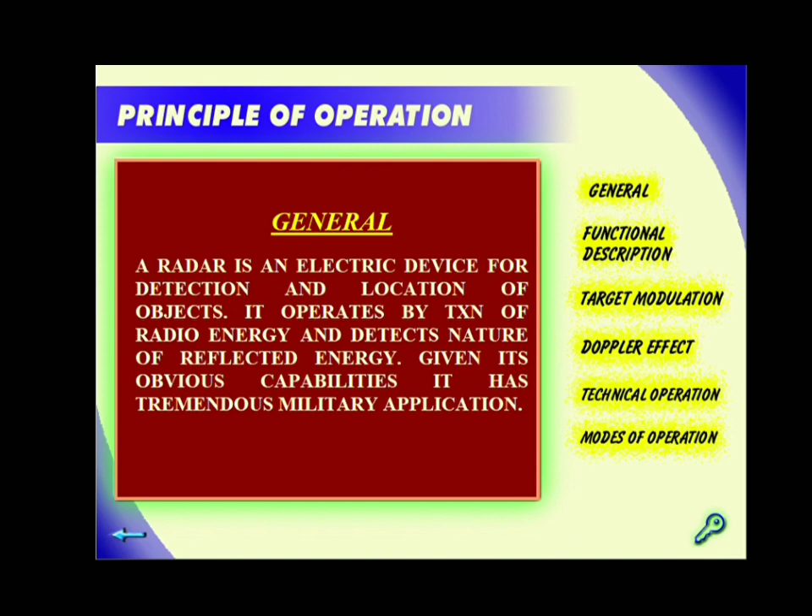Functional description. The basic functioning of the BFSR Mark II depends on the transmission of 2600 pulses of RF energy per second in a narrow beam from its antenna. Between pulses, the radar receives energy reflected back to its antenna from any object in the path of the antenna beam.

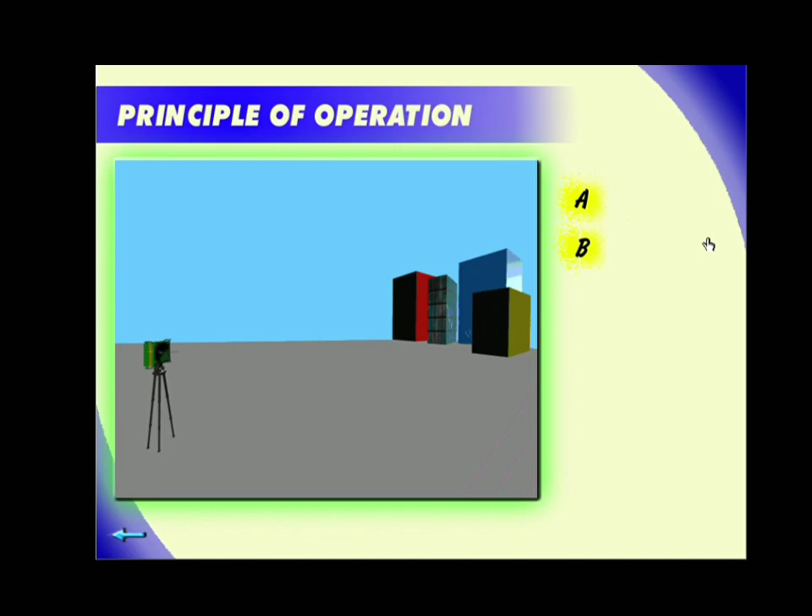Target modulation. The BFSR Mark II is a non-coherent pulse Doppler system. In this type of radar, target detection is possible only when target movement takes place in the presence of a fixed background. Target detection will be difficult in certain conditions. It is difficult in case the background is very large compared to the target, for example, a man crawling in front of a huge building. Target detection is also difficult in case the background signal is very small, for example, a large vehicle moving in a valley.

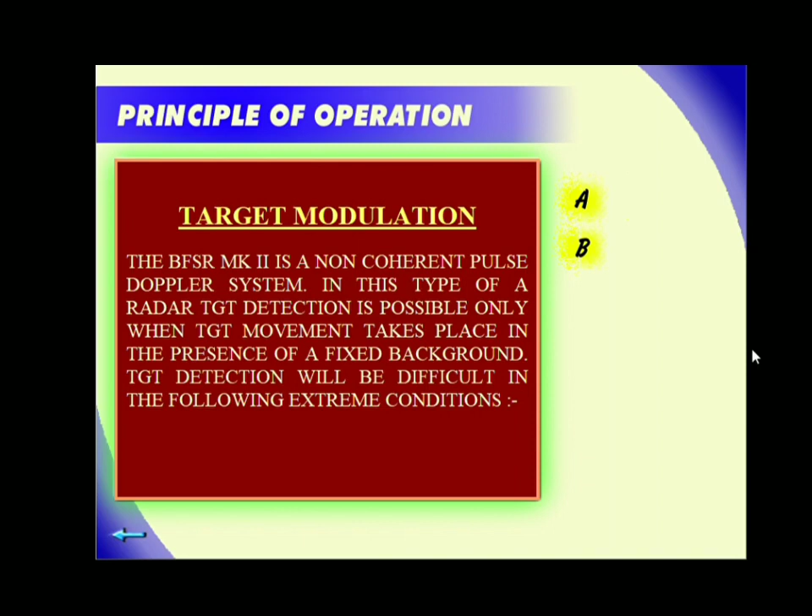Target modulation. The BFSR Mark II is a non-coherent pulse Doppler system. In this type of a radar, target detection is possible only when target movement takes place in the presence of a fixed background. Target detection will be difficult in certain conditions. Target detection is difficult in case the background is very large compared to the target. An example is a man crawling in front of a huge building. Target detection is also difficult in case the background signal is very small. For example, a large vehicle moving in a valley.

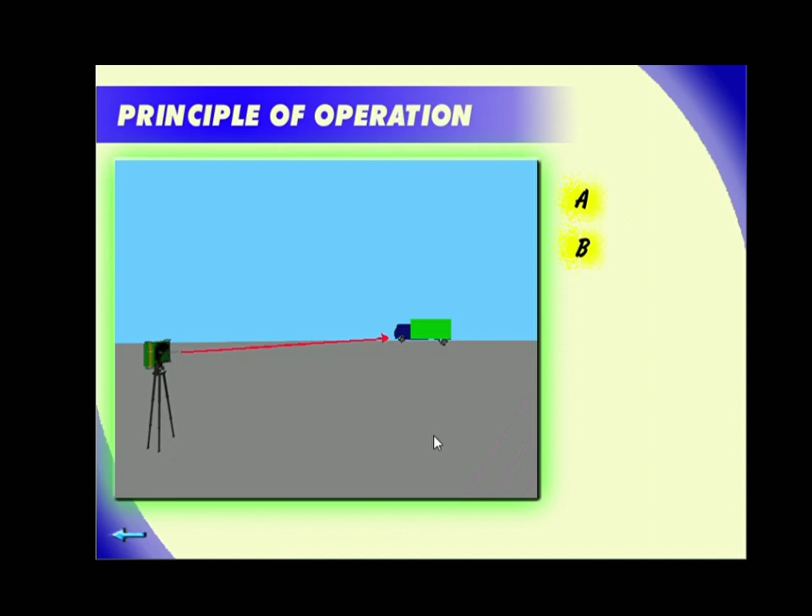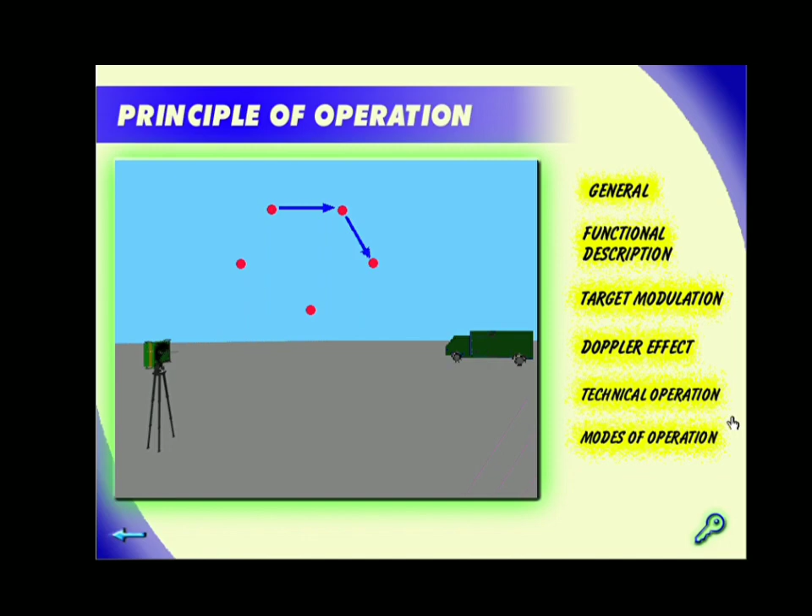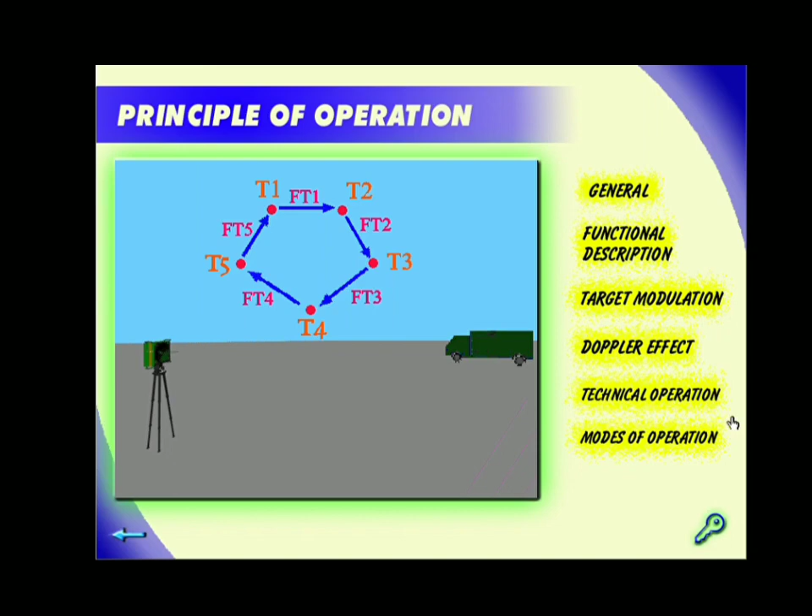The Doppler effect. Consider that there are 5 fixed targets T1 to T5. The echo signal returned from these targets can be represented by FT1 to FT5. Since all of them are fixed echoes, FTR will represent the resultant vector of these echoes. In case now there is a moving target in the same area, say MT, the return signal echo of MT with reference to FTR will vary over 360 degrees.

Each time the moving target traverses a distance equal to half the wavelength, which in the case of the BFSR Mark II is 1.5 centimeters, a phase change of 180 degrees corresponding to a target movement of 0.75 centimeters will result in the amplitude of the resultant signal varying from a maximum to a minimum value.

Hence, a continuously moving target produces a resultant signal which varies in amplitude in a sinusoidal manner. The frequency or rate of variation of this amplitude depends on the speed of movement of the target. In the BFSR Mark II, these Doppler frequencies are in the range of 40 hertz to 1200 hertz, for target speeds varying from 2 kilometers per hour to 64 kilometers per hour, which are in the lower audio band. Therefore, echoes from moving targets like men and vehicles can be heard on headsets.

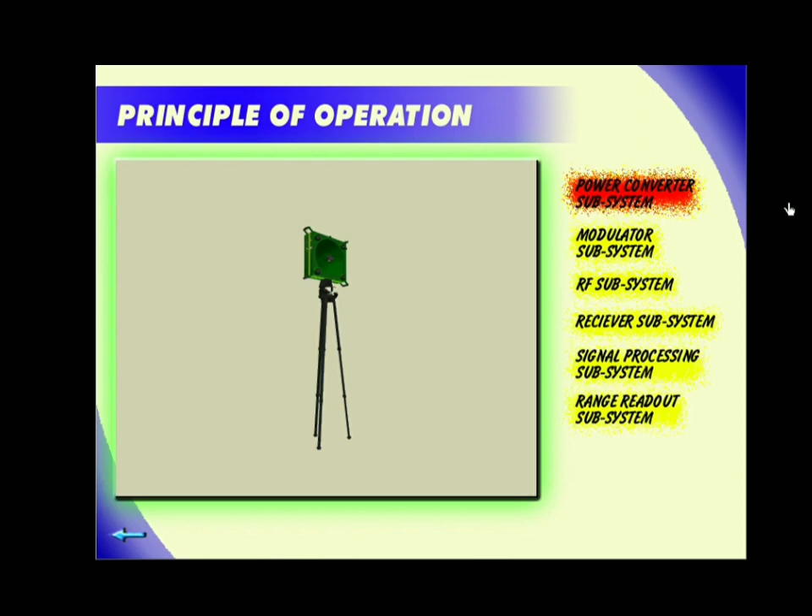The power converter subsystem receives 24 volt DC from the battery and converts it to the voltage required by the radar. It protects the radar from overload currents and incorrect input polarity. It generates master timing pulses for the system.

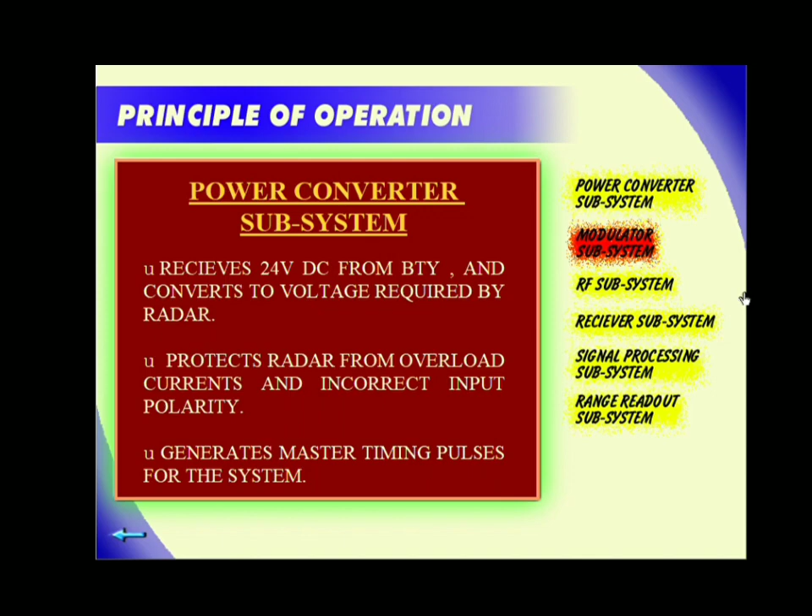The modulator subsystem generates high voltage negative DC pulses at the required pulse repetition rate.

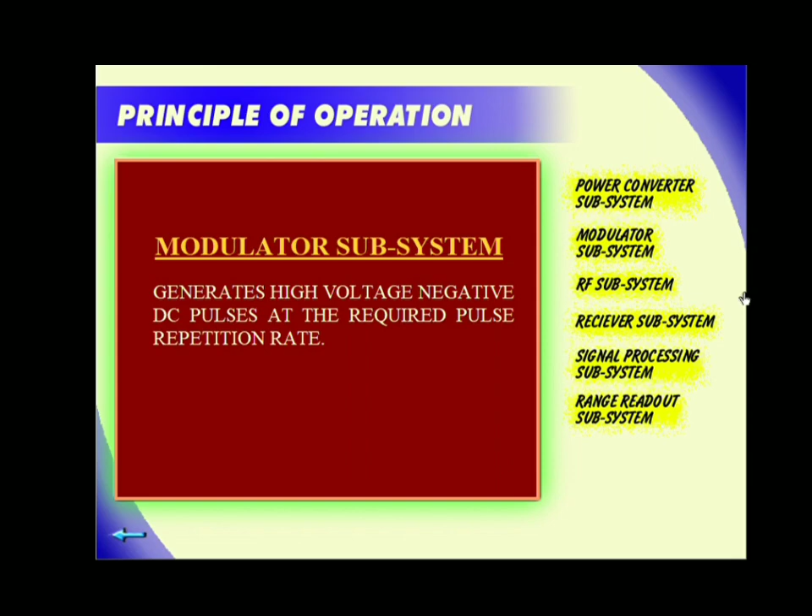The RF subsystem generates and radiates RF pulses. It receives RF target echoes. It converts target echoes from RF to IF, and it provides a confidence check facility.

The receiver subsystem converts target echo signals at IF to video signals.

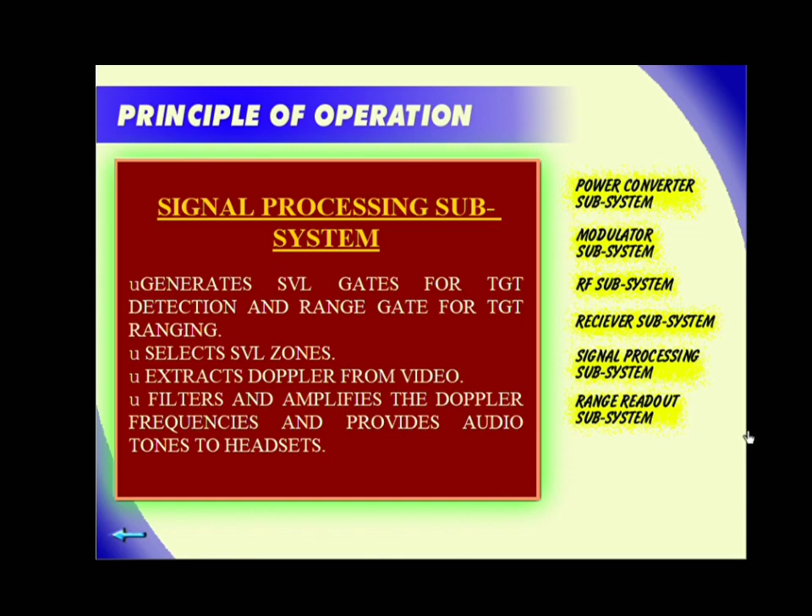The signal processing subsystem generates surveillance gates for target detection and range gate for target ranging. It selects surveillance zones, extracts Doppler from video, filters and amplifies the Doppler frequencies, and provides audio tones to headsets.

The range readout subsystem generates clock frequencies to drive displays of target range in meters. It monitors external power supply voltage and provides lamp indication for replacement of batteries. It filters and amplifies the Doppler frequencies and provides audio tones to headsets.

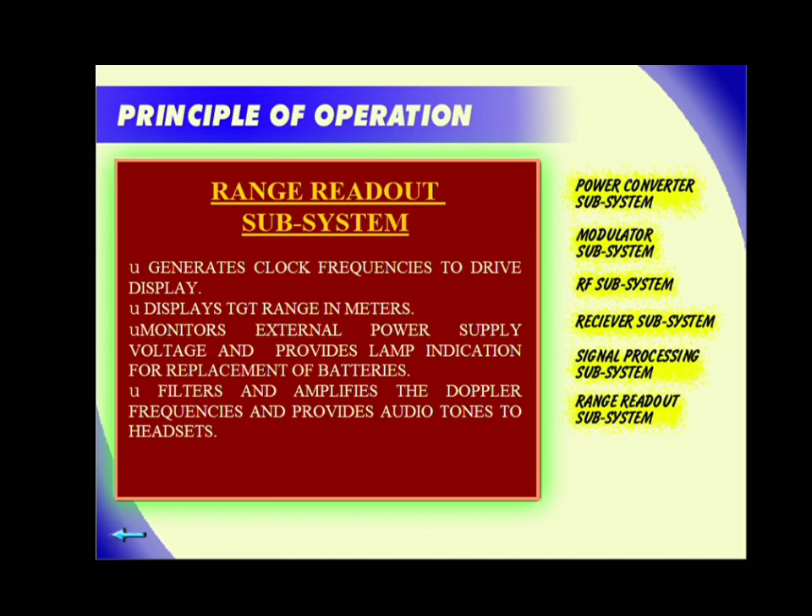The modes of operation of the BFSR Mark II. There are two basic functions the BFSR Mark II performs. The first is the determination of the presence or absence of a moving target in a given sector within its range capability. Having determined that the moving target is present within the radar's coverage, the second function is to obtain information regarding the position of the target, that is, the azimuth angle and the range, the nature of the target, that is, vehicle or personnel, and the activity the target is involved in.

Keeping this in mind, the signal processing circuit of the BFSR Mark II can be operated in two modes.

The surveillance mode. In this mode of operation, the detection range of 3,200 meters is divided into 4 surveillance zones, each of 800 meters. Each of these surveillance zones, in turn, consists of 8 surveillance gates. In case a moving target exists in a particular zone, a Doppler signal is heard.

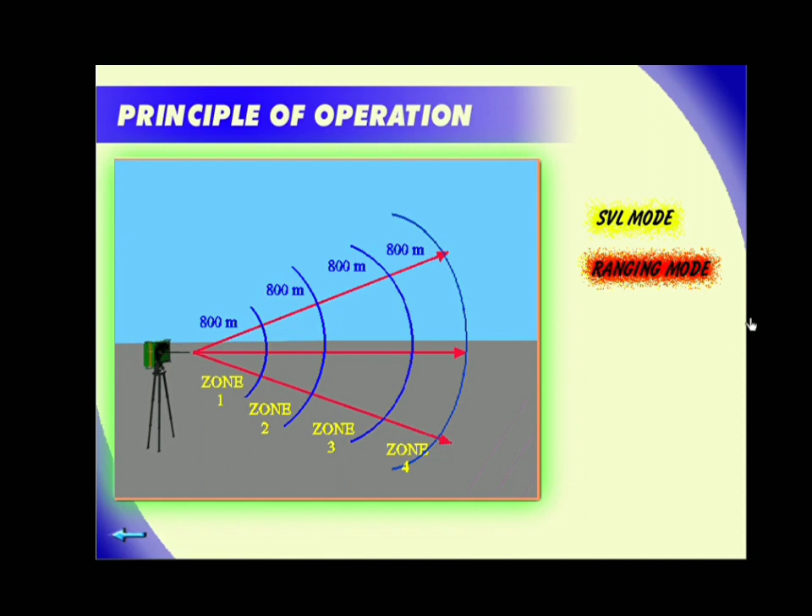The ranging mode. Having determined the presence of a moving target, the ranging mode enables the target range to be obtained. In this mode, the target can also be tracked as the signal processing subsystem generates a single range gate of 0.66 microseconds width, corresponding to a range of 100 meters, which can be continuously moved by a ranging handwheel. Thus, the target detected in a particular zone can now be pinpointed up to the nearest 100 meters.

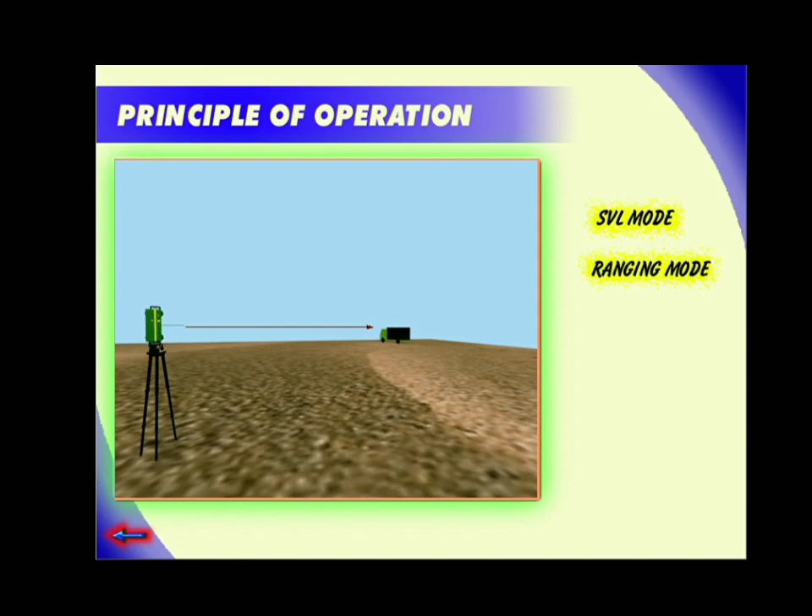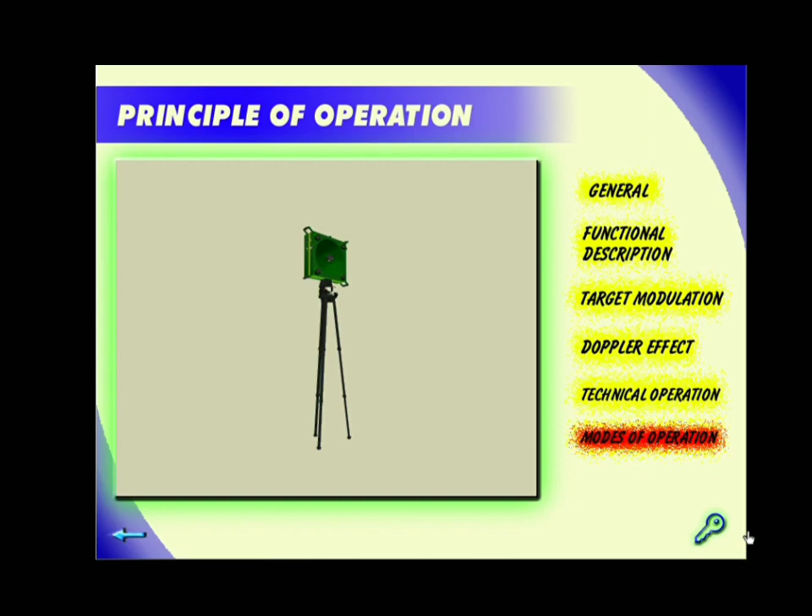The modes of operation of the BFSR Mark II.

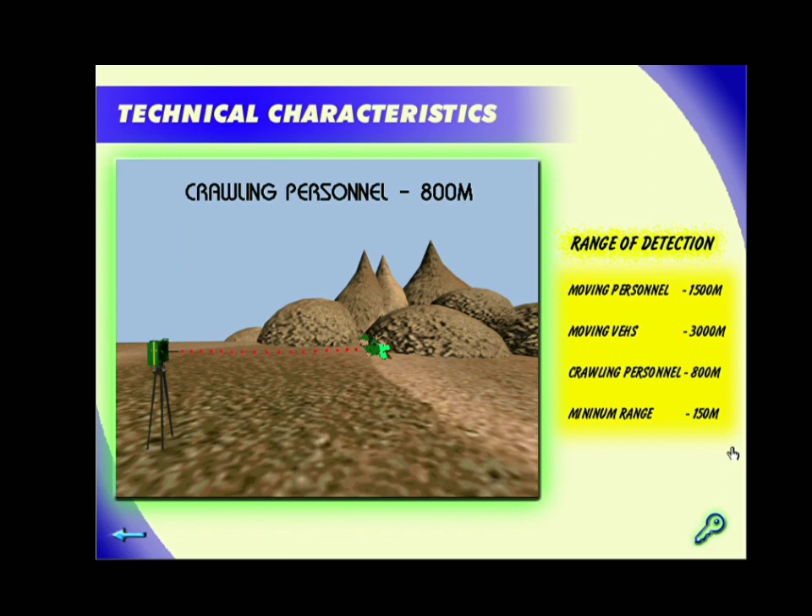The range of detection of moving personnel is 1500 meters. The range of detection of moving vehicles is 3000 meters. The range of detection of crawling personnel is 800 meters. The minimum range of the BFSR Mark II is 150 meters.

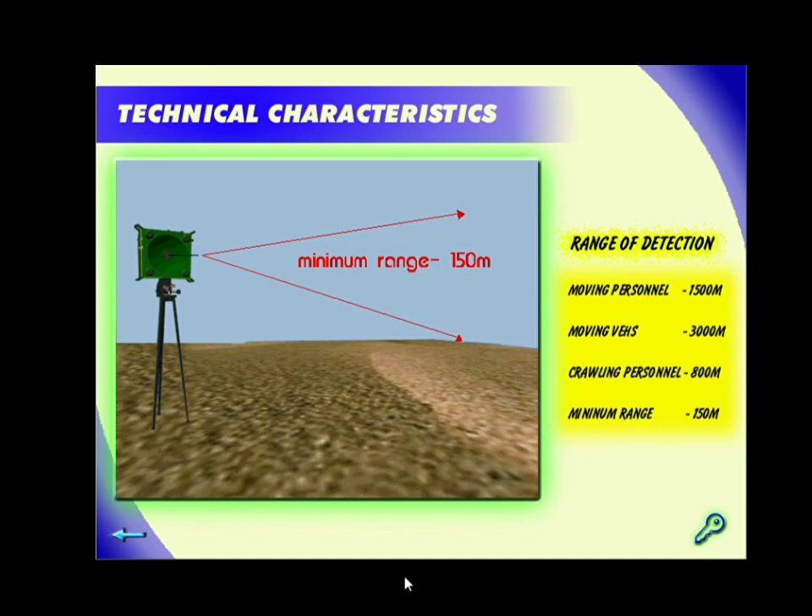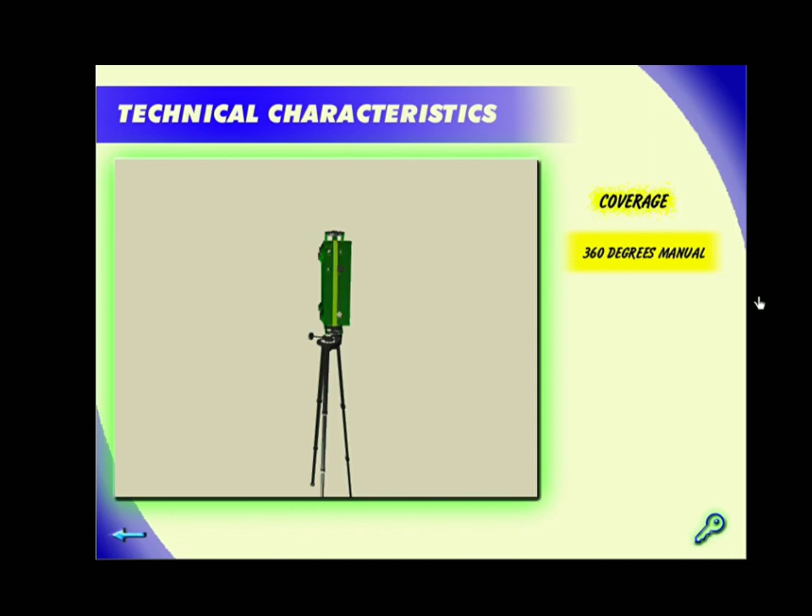The BFSR Mark II has a 360 degrees manual coverage. The setting up time of the BFSR Mark II is 5 minutes.

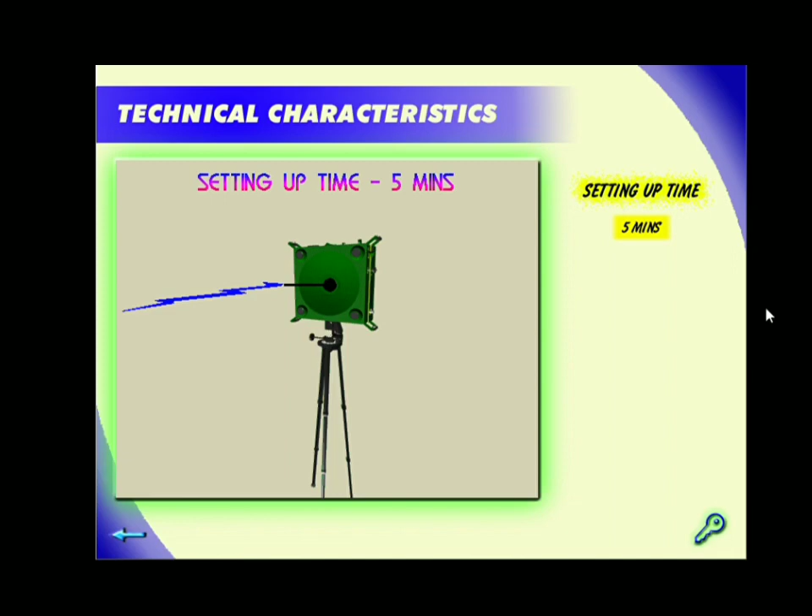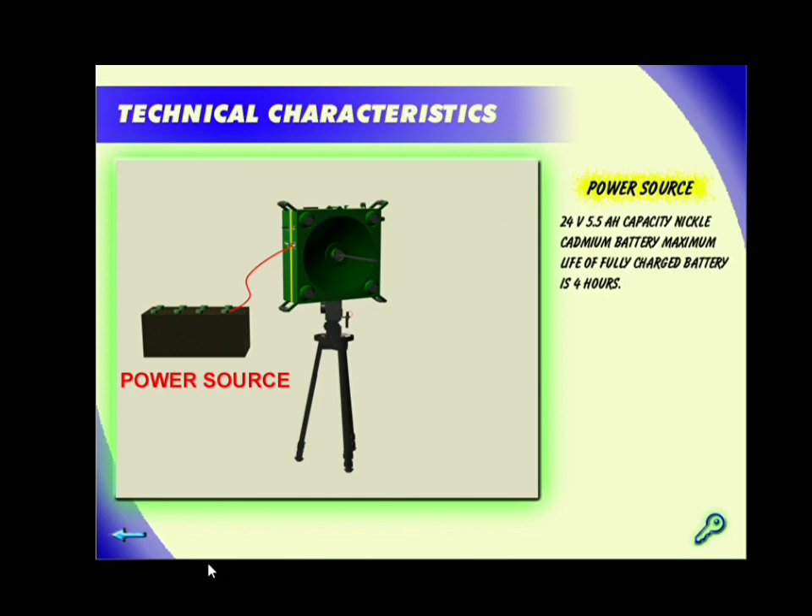The BFSR Mark II has got a 24-volt nickel cadmium battery which has got a maximum life of 4 hours. The weight of various components is as follows: the radar unit is 6.4 kgs, the battery pack is 7.5 kgs, and the tripod stand is 2.2 kg.

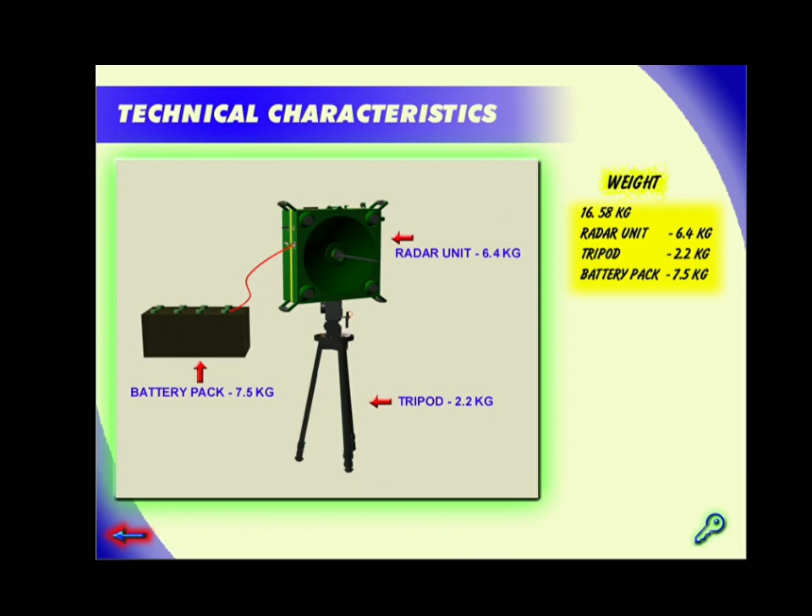The BFSR Mark II transmits RF pulses at a frequency of 9750 MHz.

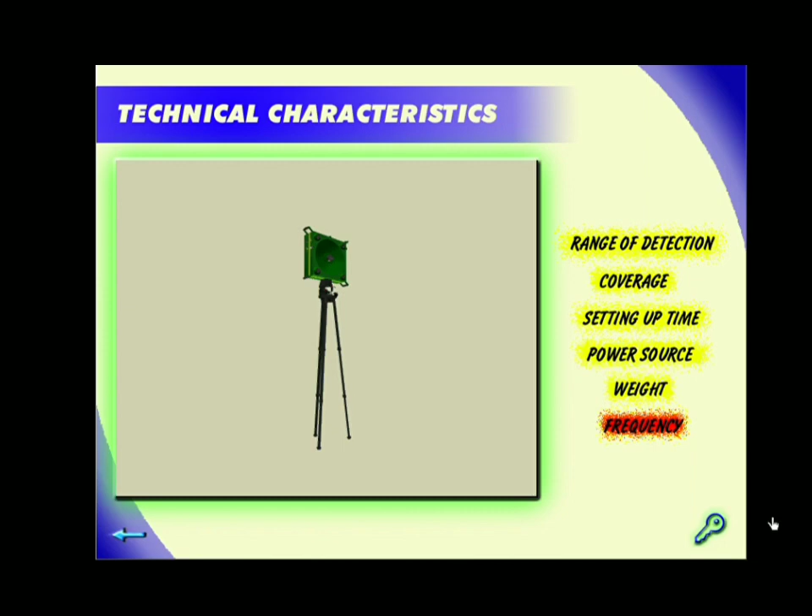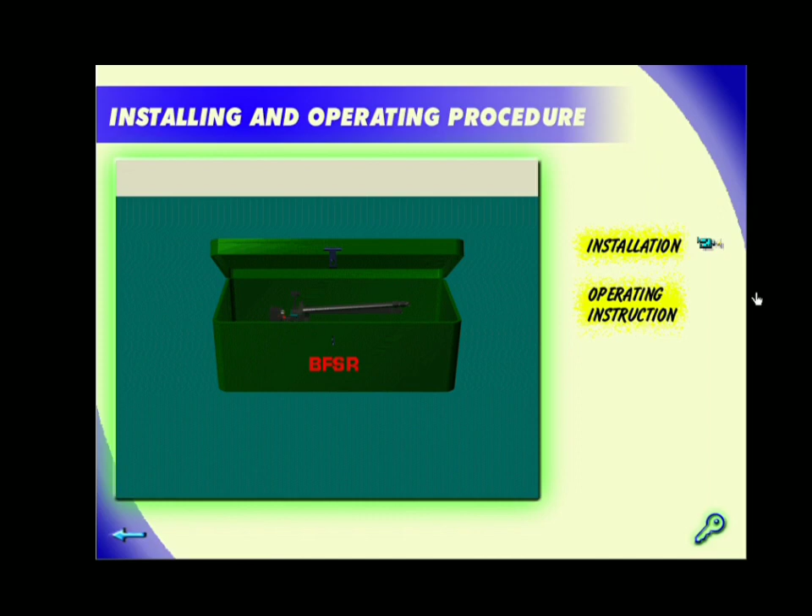Installation procedure: unpack the legs on a level piece of ground and open them. Extend the legs till the required height is obtained and lock them. Screw in the control handle and loosen the base plate locking knurled knob.

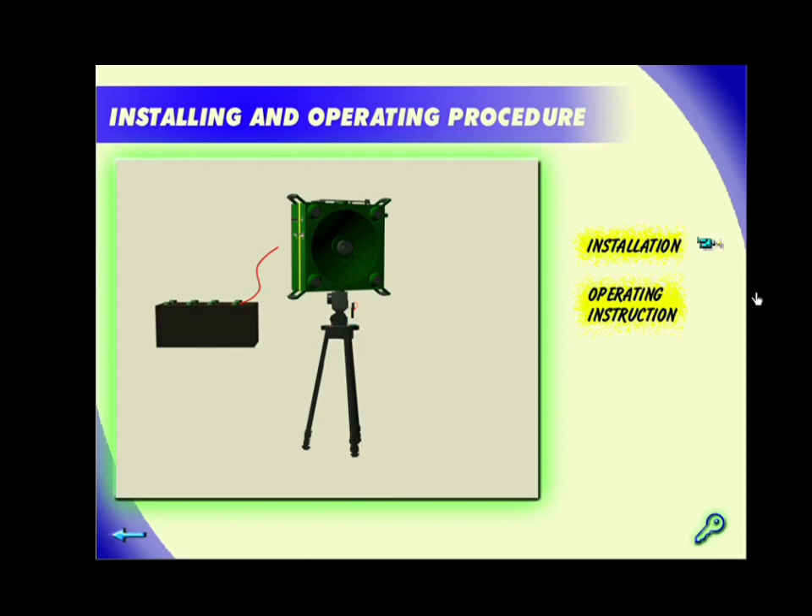Remove the radar unit and mount it on the tripod mounting. Position the radar in such a way so as to ensure the antenna faces away from the operator. Lock the knurled knob and fix the waveguide dipole onto the antenna reflector.

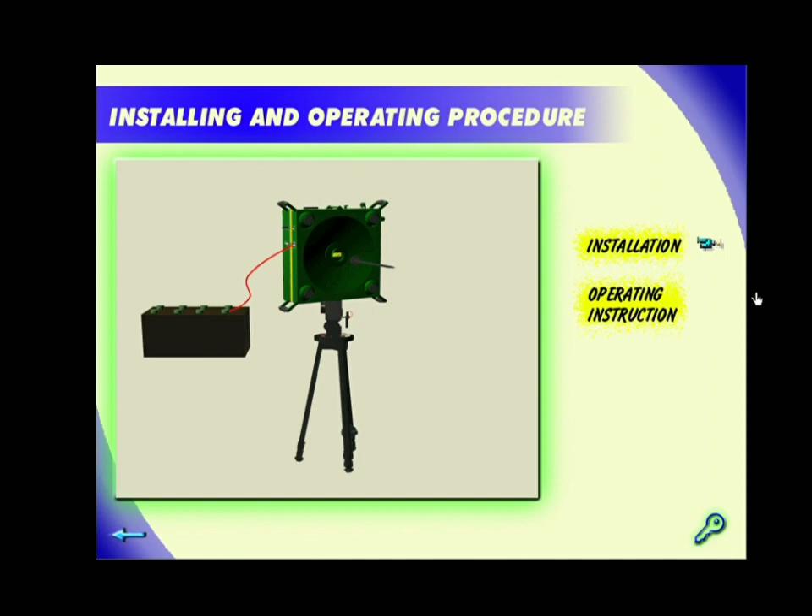Connect the headset assembly. Connect the power cable to the input 24-volt connector on the left side of the radar casing. Now connect the battery, and ensure that power is switched off before making the battery connection.

Thereafter, place the pentaprism on the range readout window, which is useful for the operator to read the range values without exposing his face. The equipment is now ready for operation.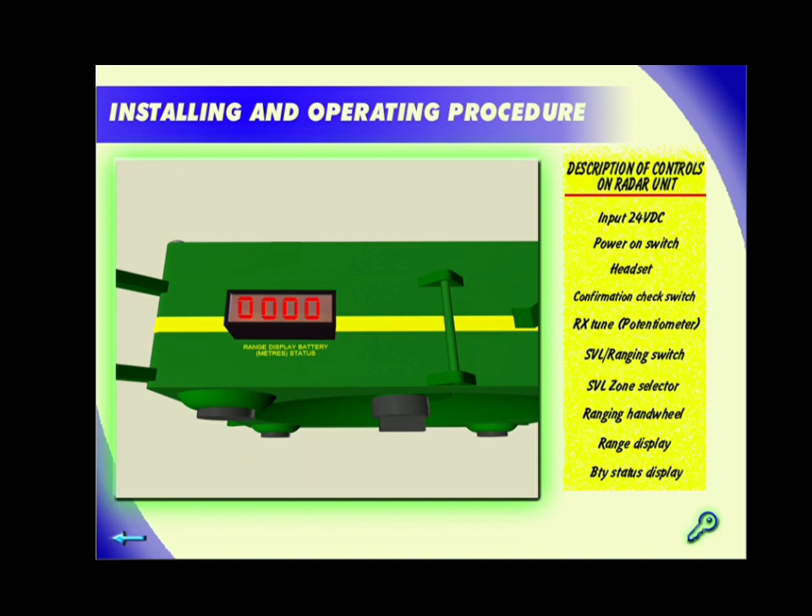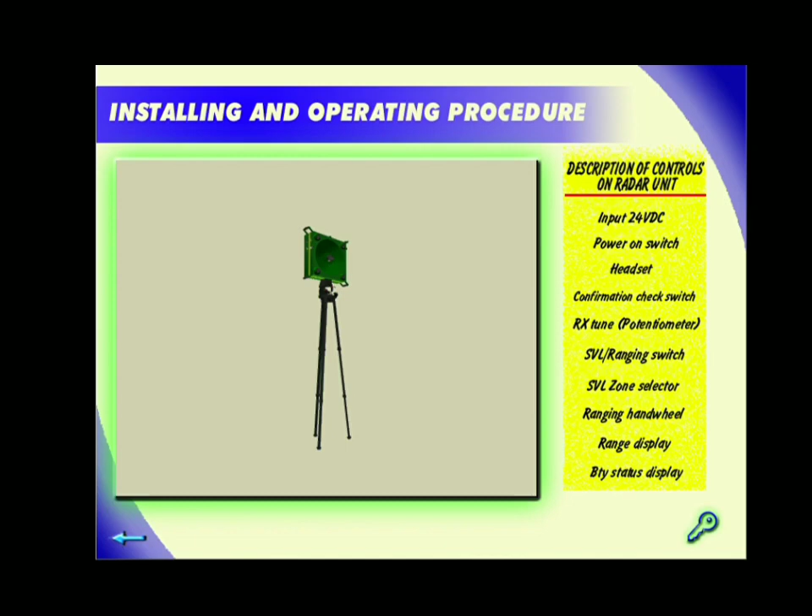The controls on the tripod stand: input 12-volt DC receives voltage from radar to illuminate the azimuth dial. The illumination on/off switch switches on the bulb in the azimuth dial.

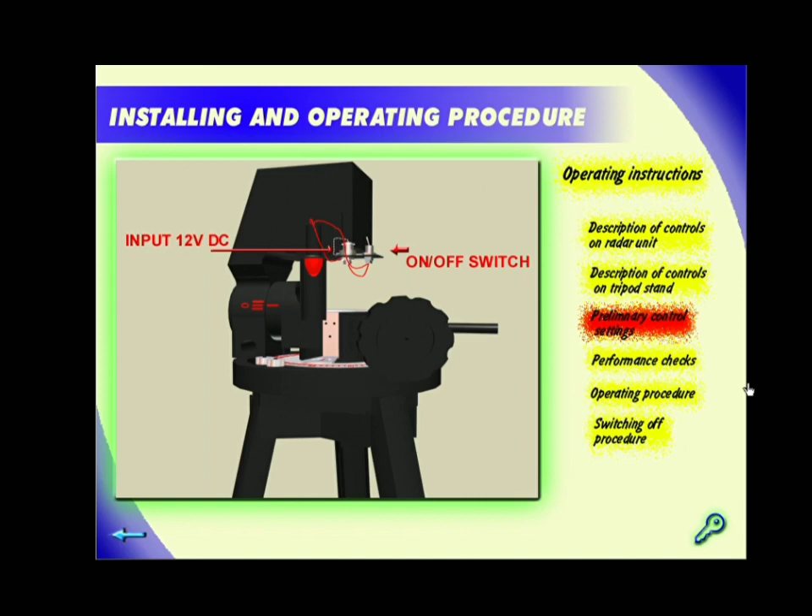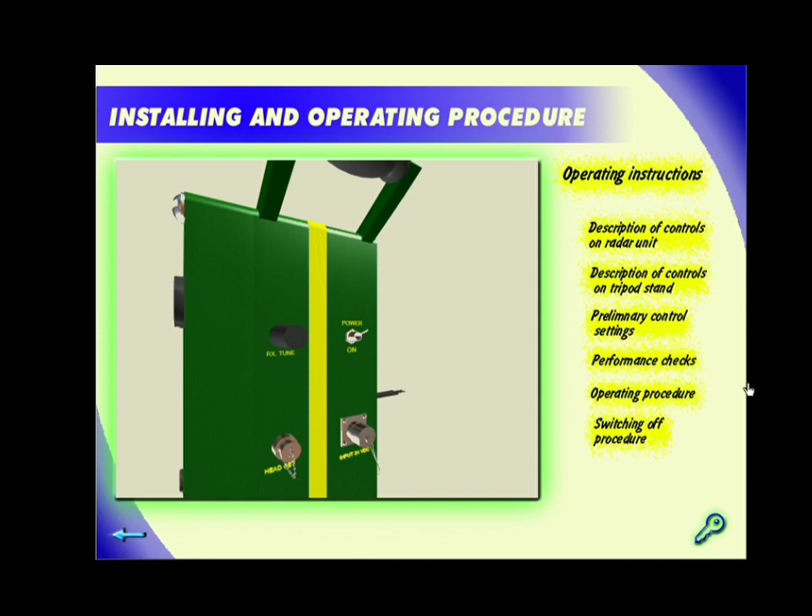After installing the radar, various controls of the radar unit are set as indicated before applying power to the radar. The power switch must be off, the RX tune must be fully counterclockwise, and the surveillance zone selector must be in position 1, that is for 0 to 800 meters.

Before operating the BFSR Mark II, certain performance checks must be carried out. These are the battery status indicator, range display, hissing noise in the headset, and conf check switch. The RX tune switch should be adjusted to the minimum.

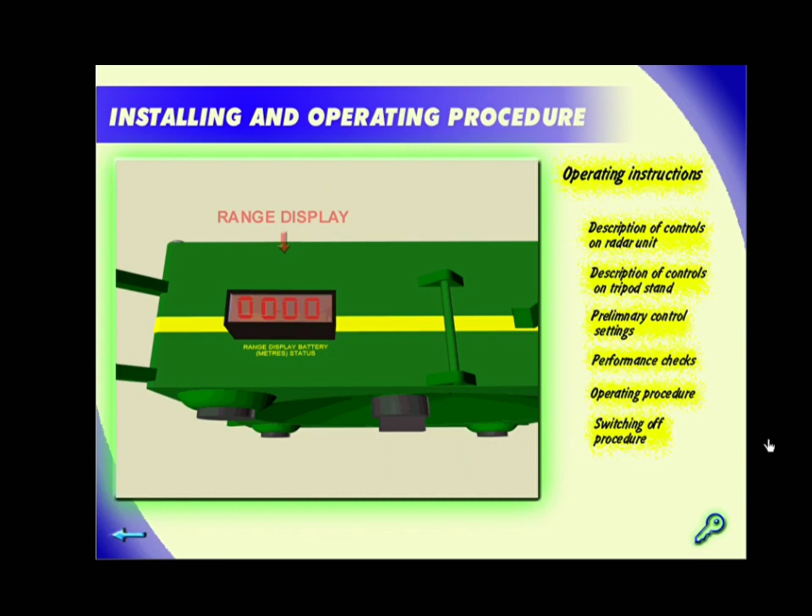Before operating the BFSR Mark II, certain performance checks must be carried out. These are the battery status indicator and range display.

The operating procedure: once the radar has been installed, checked and switched on, put the surveillance zone selector on position 1, that is for 0 to 800 meters. Move the antenna in azimuth from its initial reference position in a slow, smooth and continuous manner over the sector to be covered from left to right.

After covering the sector, set the surveillance zone selector switch to position 2 and move the antenna in the reverse direction. Similarly, cover zones 3 and 4. Complete the surveillance and bring the antenna to its initial position.

Continue the surveillance for as long as required. Observe for any audio signals in the headset. The radar can similarly carry out surveillance of a sector in a given fixed azimuth direction. In this case, the antenna need not be moved from left to right.

Once a target has been detected, the ranging can be carried out by switching over to the ranging mode. In order to find out the range, the ranging hand wheel will be required. The coordinated movement of the ranging hand wheel and the antenna in azimuth will ensure efficient tracking of a moving target.

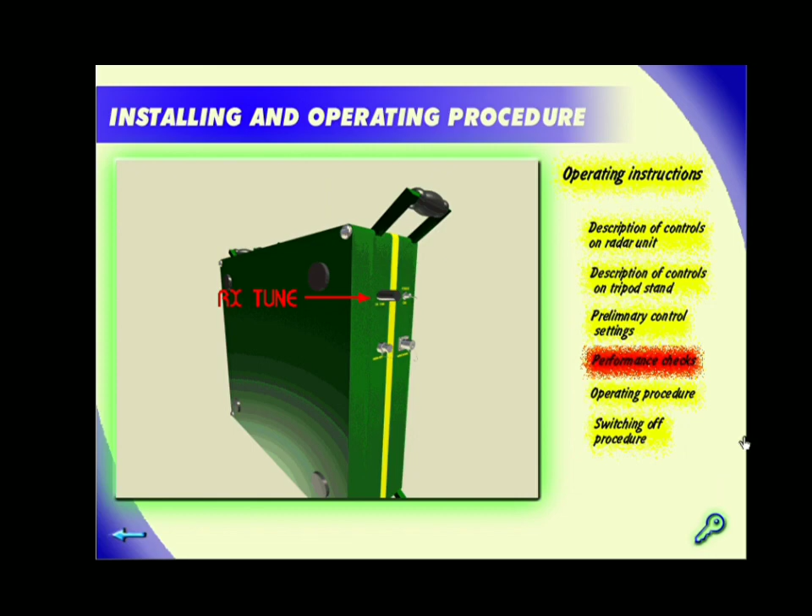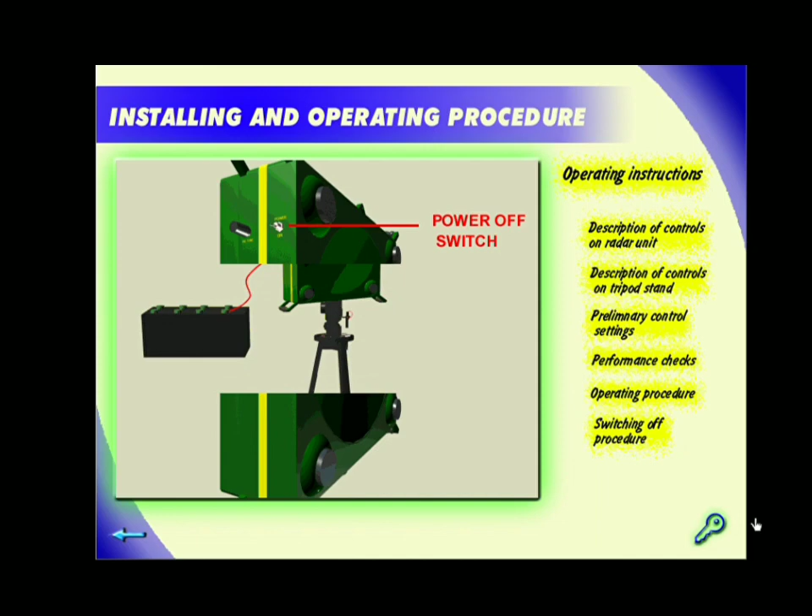The switching off procedure for the BFSR: bring the surveillance or ranging switch to surveillance position, switch the power off, remove battery connections, remove power cable connection from input 24-volt DC connector, remove headset connector, and finally remove the BNC cable from the connector on the tripod stand.

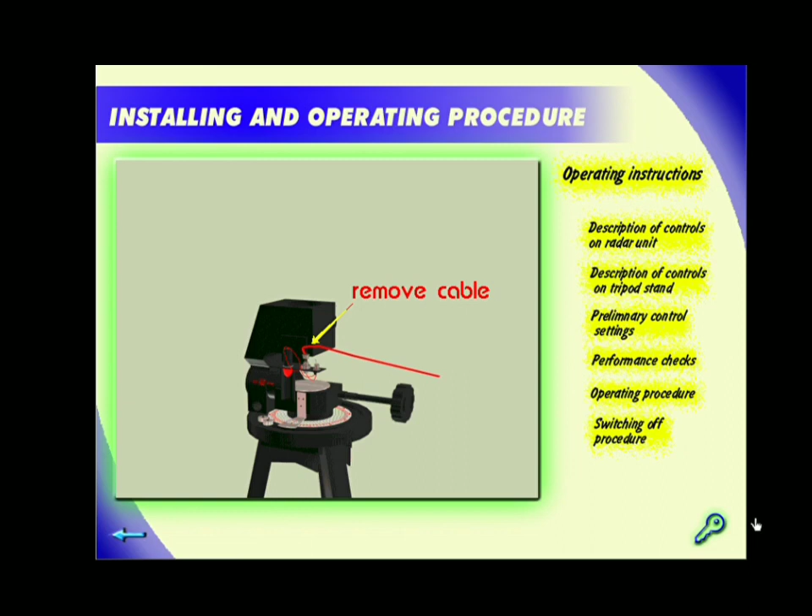The BFSR Mark II consists of two major functional parts, the radar unit and the tripod stand.

The radar unit measures 40.4 centimeters in length and width, and it is 16.6 centimeters in depth, which includes the corner handles, and it weighs approximately 6.4 kgs. The radar unit casing is made of aluminium.

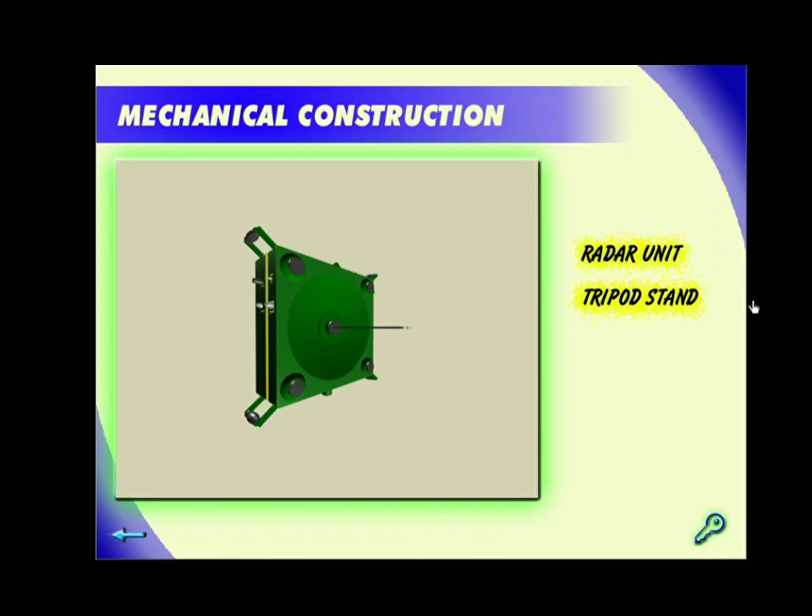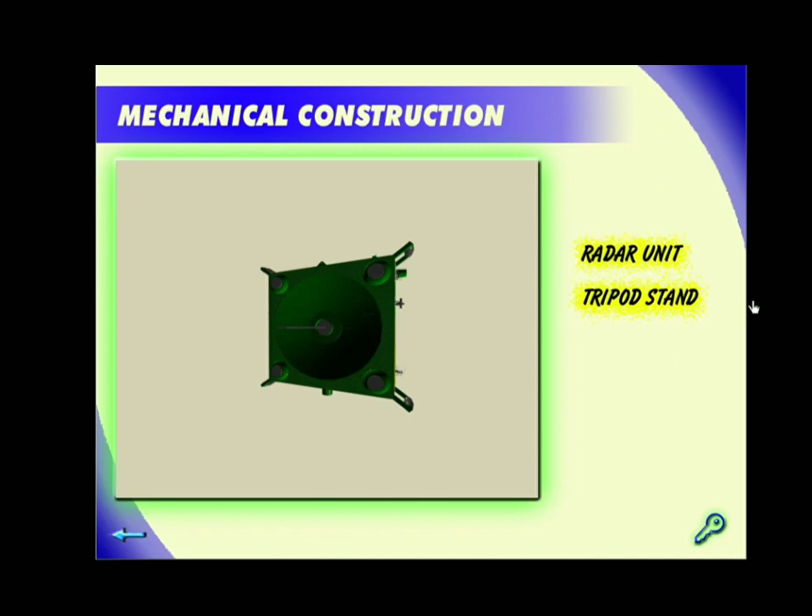The parabolic reflector of the antenna assembly and the waveguide dipole feed, used as the primary radiator, are the important functional components. The operating controls are located on the side of the unit, and a transparent window is provided on top of the unit, inside which are located the range indicator and battery status indicator.

The various electronic subsystems and components are mounted inside the casing. The radar unit can, with the help of a tube, be mounted on the tripod stand.

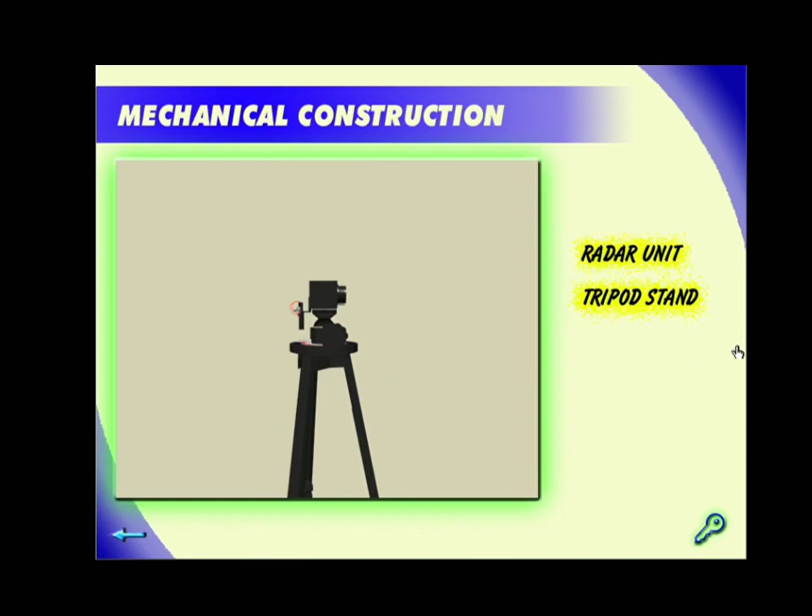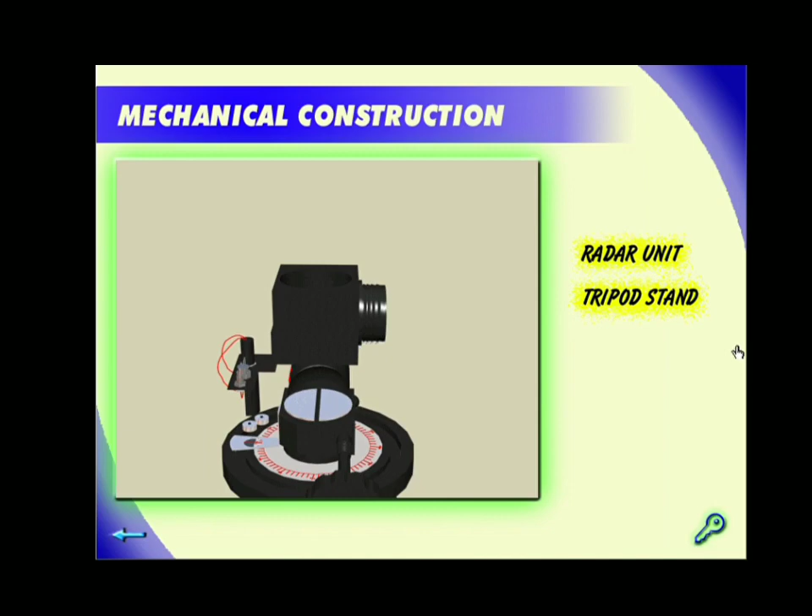The tripod stand consists of a mounting head assembly and 3 telescopic legs. The radar unit can be mounted on the mounting head assembly and is fixed with the help of a knurled knob. A calibration scale is fitted on the mounting head for azimuth with graduation in degrees from 0 to 360.

An incandescent lamp illuminates the azimuth scale. The mounting head assembly can be rotated in azimuth over 360 degrees. The mounting head can also be laid for a limited amount of elevation tilt and locked at the desired angle.

The telescopic legs are of adjustable length, and the height of the tripod stand can vary between 61 centimeters and 133 centimeters.

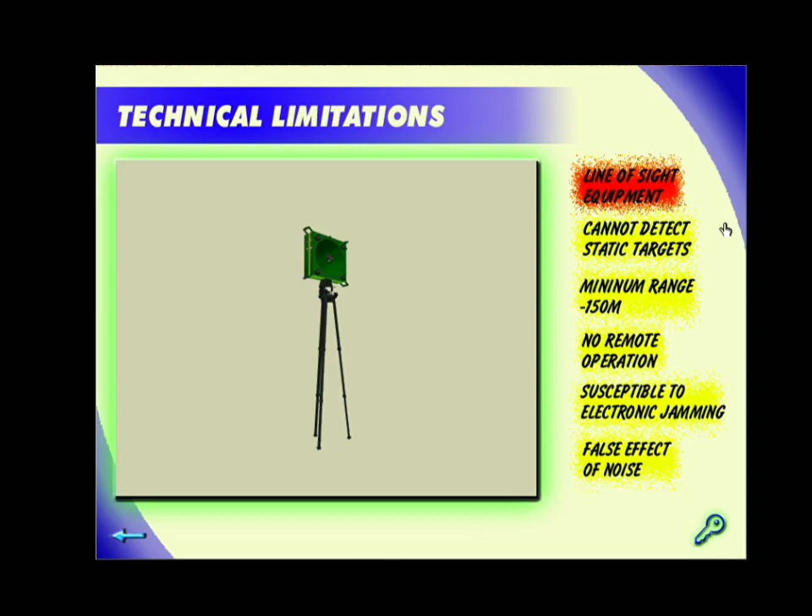The BFSR Mark II is a line of sight equipment. Therefore, any obstruction in its path will limit its detection capabilities.

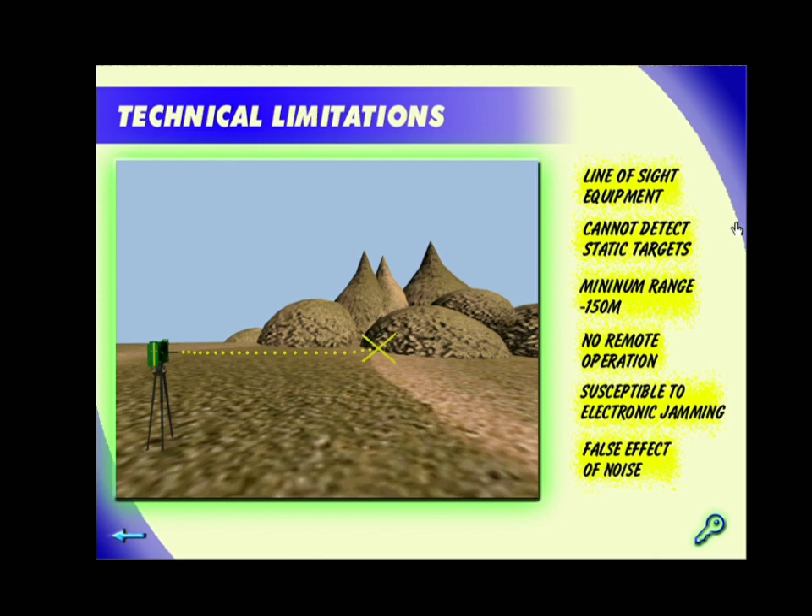The BFSR Mark II cannot detect static targets.

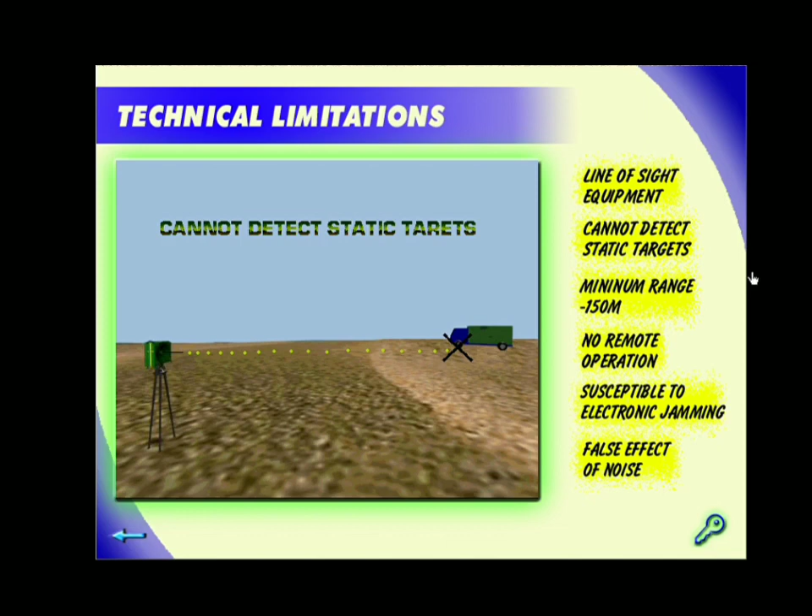The BFSR Mark II is limited in its performance by a minimum range, which is 150 meters.

The BFSR Mark II cannot be operated remotely.

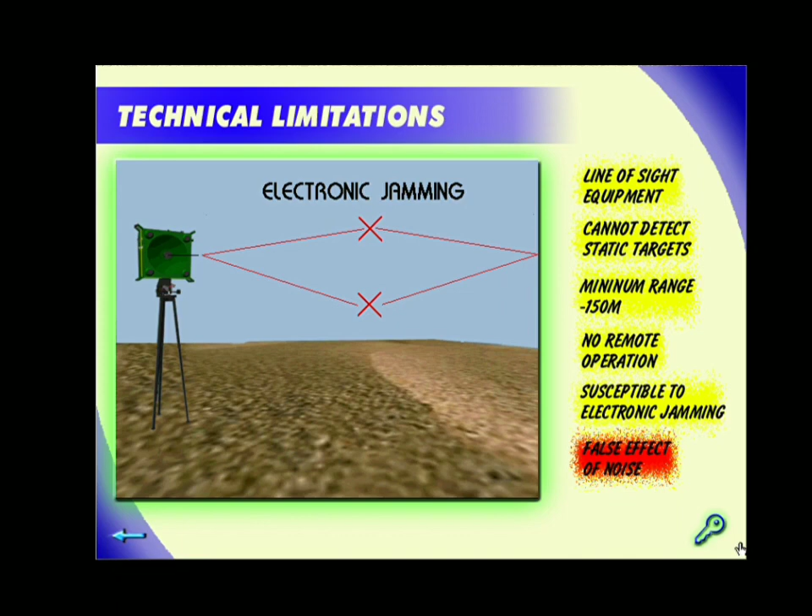The BFSR Mark II, being an electronic equipment, is susceptible to electronic jamming. The BFSR is susceptible to a false effect of noise.

Mountainous country is defined as country which is at least 1,500 meters in height and is characterized by steep slopes and deep valleys.

The mountainous terrain combined with climatic variations severely impairs the mobility of forces. It affects their organization and equipment and has considerable bearing on strategic, tactical and logistic concepts, and above all, it demands a very high standard of physical fitness and endurance.

In our context, the mountainous regions can be classified into 3 categories, namely low altitude, high altitude and glacier areas. The peculiar characteristics of high altitude, glaciers and extreme cold weather conditions influence military tactics and logistics.

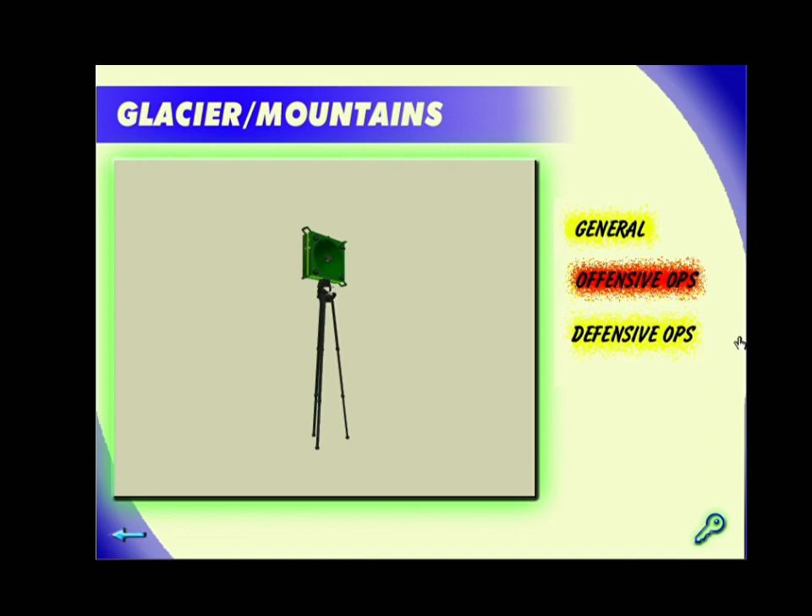In mountains, the BFSR Mark II can be effectively used in offensive operations for obtaining the following information: information of enemy deployment, information of enemy early warning elements, information regarding enemy pattern of patrolling.

In mountains, the BFSR Mark II can be effectively used for defensive operations. These are surveillance of gaps in defenses and likely infiltration routes, surveillance of likely enemy approaches. As part of early warning elements, provide information for launching spoiling attack, and surveillance of likely enemy FUPs and forward assembly areas.

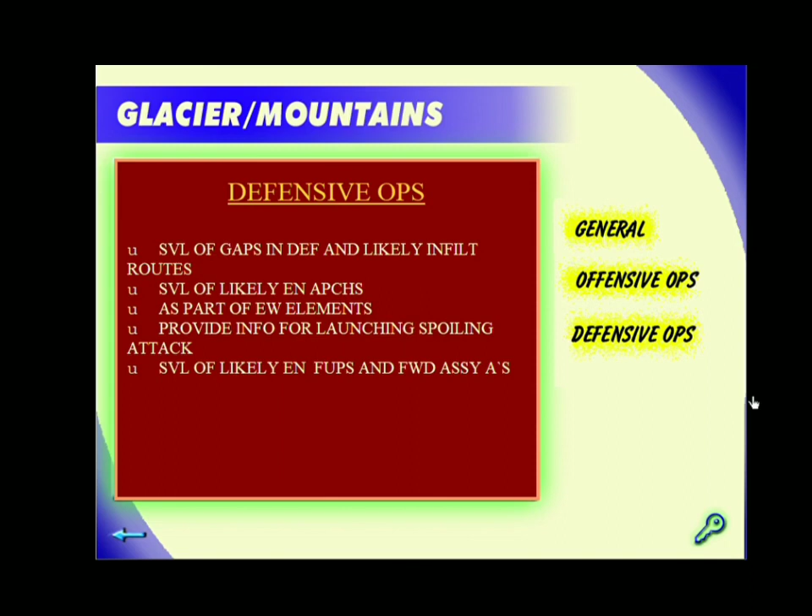The plains area of our country stretches from Jammu to the northern part of Rajasthan. It is primarily cultivated land which is crisscrossed by a number of obstacle systems.

These obstacle systems are the DCB, canal, and the Dhussi. These obstacles have been primarily made as anti-tank obstacles. Being open country, the BFSR has an important role to play to detect enemy movement and warn of his intentions.

Surveillance of enemy deployment, including forward zone elements, and provide information of enemy pattern of patrolling. Surveillance of own routes of movement, surveillance of own FUP and forward assembly area, assist in bridgehead protection.

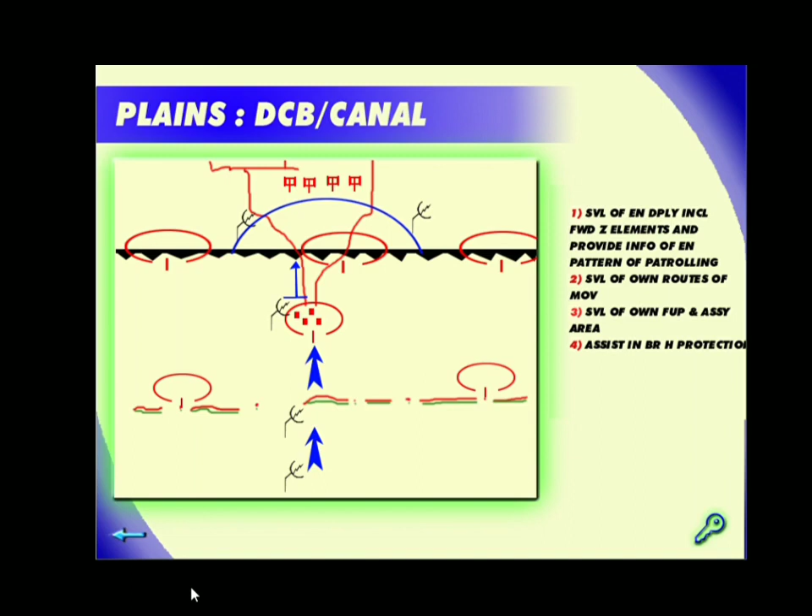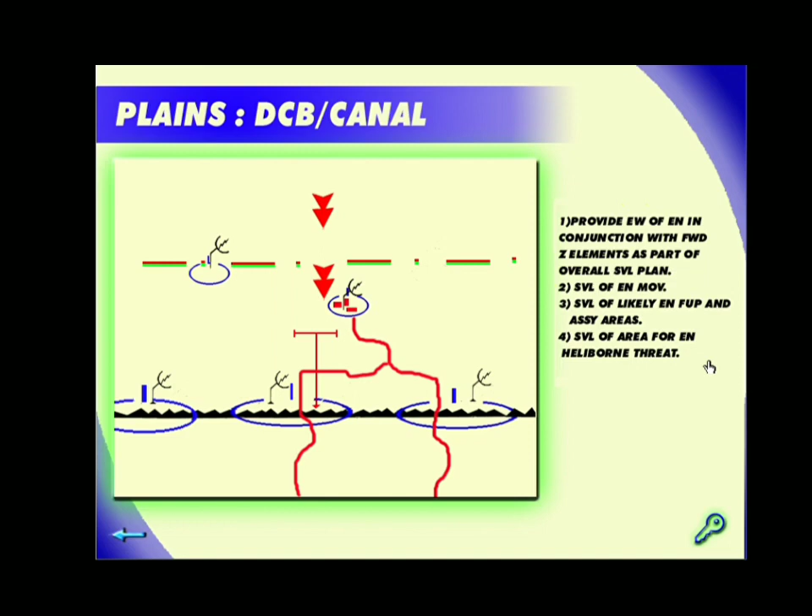Provide early warning of enemy in conjunction with forward zone elements as part of overall surveillance plan. Surveillance of enemy movement, surveillance of likely enemy FUP and forward assembly areas, surveillance of area for enemy heliborne threat.

The desert sector of our border stretches for almost 1000 kilometers, primarily in Rajasthan and Gujarat. Most of the region is sandy, arid, and thinly populated. The road communications are poor, however, in certain areas they are fairly well developed.

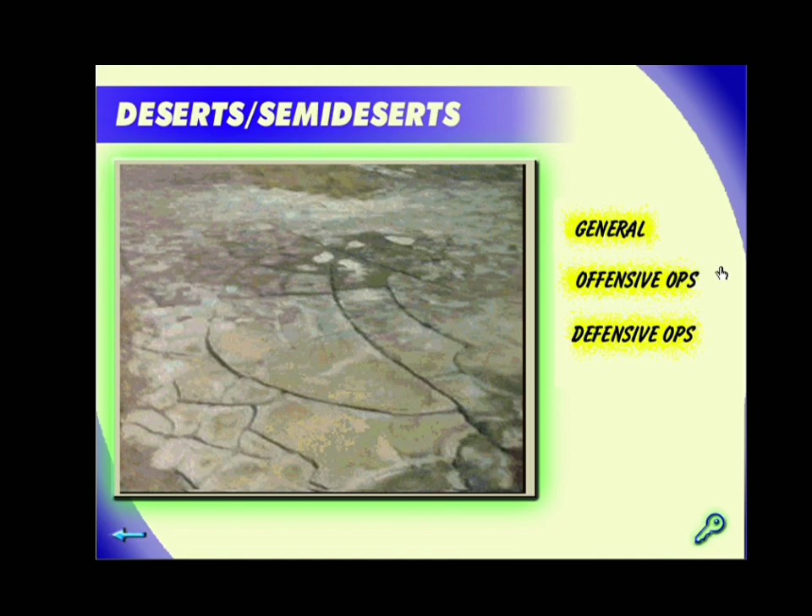Paucity of water resources is a common feature. Recently, certain ecological changes have taken place, resulting in the capability of limited cross-country movement. Hence, the term semi-desert has come into being. This is primarily open country and the BFSR will play an important role in this type of terrain.

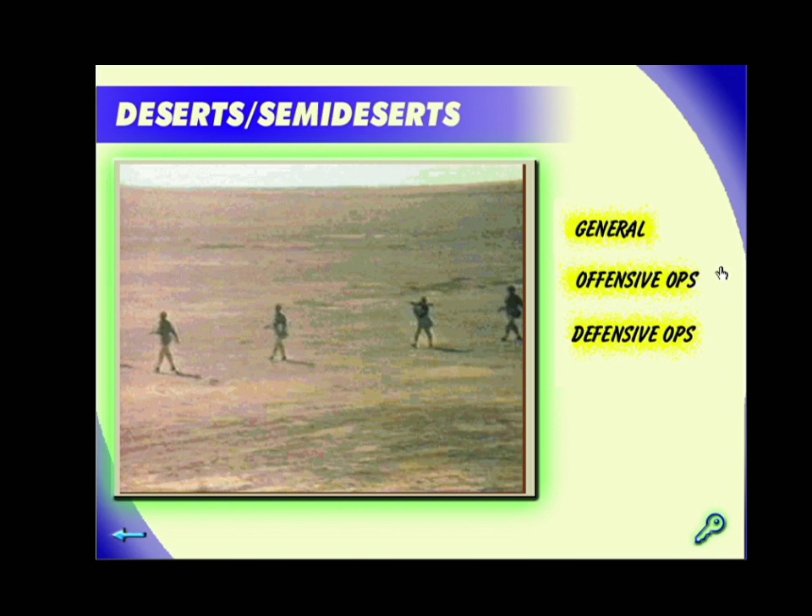Provide information of enemy deployment, including forward zone elements, as part of the overall surveillance plan. Surveillance of own routes of movement, surveillance of own FUP and forward assembly areas.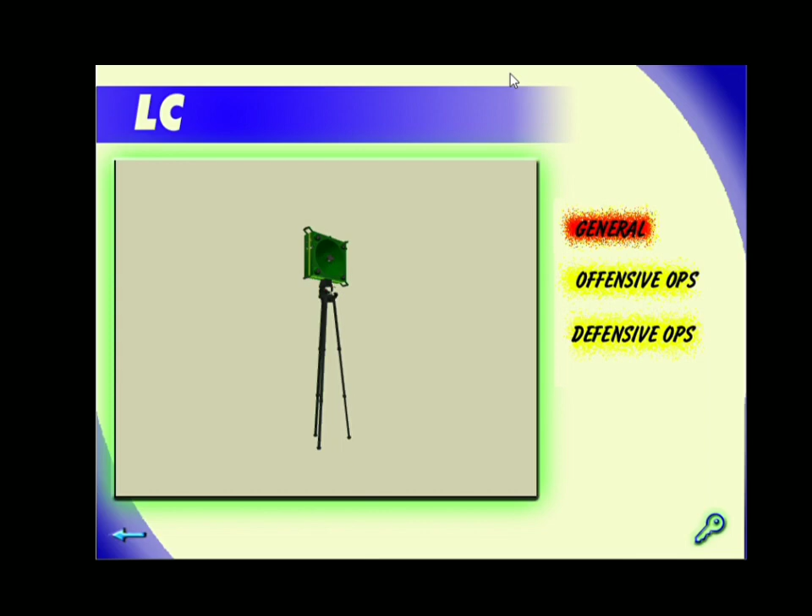The line of control exists in the Jammu and Kashmir state. The altitude of hills and valleys ranges from about 2000 feet to 10,000 feet. The line of control crosses the valleys, ridges, and spurs against the grain of the country, posing problems for defending these high grounds and valleys.

Dominating features along the line are designated as key localities, which form grounds of considerable tactical importance for holding forward defended localities. The primary task of troops occupying defenses in such areas is to maintain the sanctity of the line of control. The BFSR Mark II will play an important role in ensuring the sanctity of the line of control.

For offensive operations on the LC, the BFSR Mark II can be used as follows: provide information of enemy deployment, provide information of likely infiltration routes and gaps in enemy defenses, surveillance of own FUP and forward assembly areas, surveillance of own routes of advance, information of enemy patrolling.

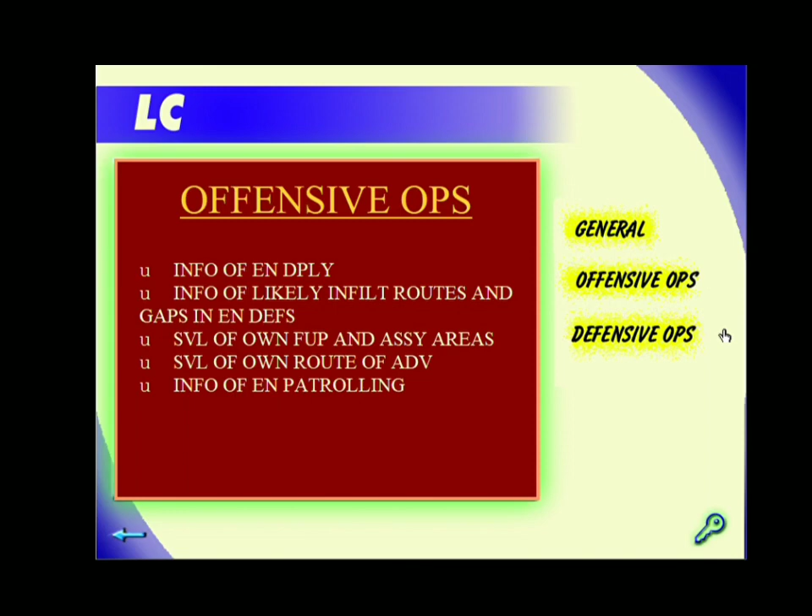For defensive operations along the LC, the BFSR Mark II can be used as follows: surveillance of area of responsibility, surveillance of gaps in defenses and likely infiltration routes, surveillance of enemy movement, surveillance of likely enemy FUP and assembly areas, surveillance of rear areas.